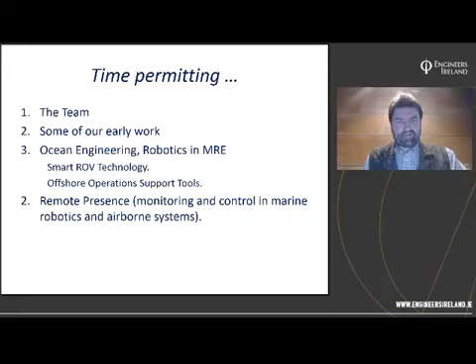So in some respects, there's overlap to space robots in that we are interested in a certain amount of teleoperation. I guess it's worth saying that some folks in the marine robotics world call it inner space, in that we look up the heavens, we can see to the far-flung galaxies, we can see back to large fractions of the time to the start of the universe. Stand on the prow of a ship and look into the ocean, you can hardly see 1 meter through the water. So in many ways, the seabed and the ocean environment is hidden from us. That's a quick look at some of the team.

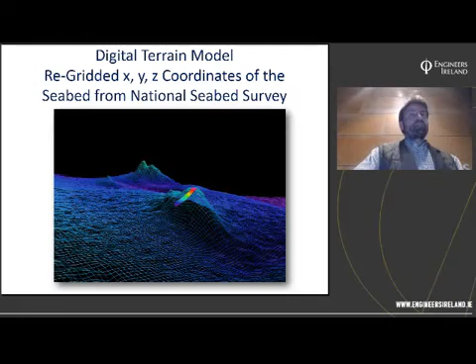So we started making robots, AUVs and whatnot, around the early noughties. In early noughties, we ended up teaming up with marine scientists. So that got us engineers out of the lab and trying to deal with stuff in the ocean. So that image is a regridded seabed terrain based on data captured by the Irish National Seabed Survey. Our brethren in Galway did the regridding, and when you regridded it at a lower geometry, lo and behold, certain mounds started to appear. And back in the early noughties, they discovered that the deep oceans have coral mounds.

So we ended up funded by HEA PRTLI, working on investigating coral mounds. We were the engineers going out trying to put the imaging sonars, the precision navigation on robots, and they're interested in the data for sonar mapping, video analysis and sampling to map the extent of the coral mounds in the ocean. There's significant coral mounds around the edge of the continental shelf, and there's some images of them just there.

When on this ship, we were integrating sonar and navigation instruments on a hired-in robot from Norway, and kicking the tires, we thought to ourselves, there's not a lot in that we can't do. So that's exactly what we did. We started off building our own robot. So we are essentially an engineering technology research centre addressing challenging domains in ocean and airborne environments.

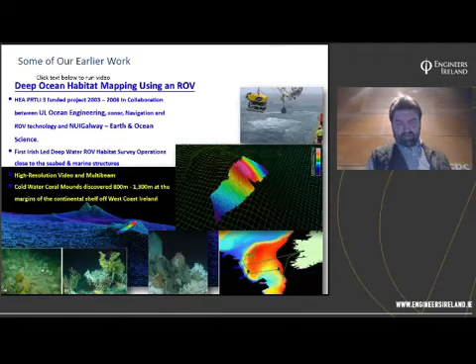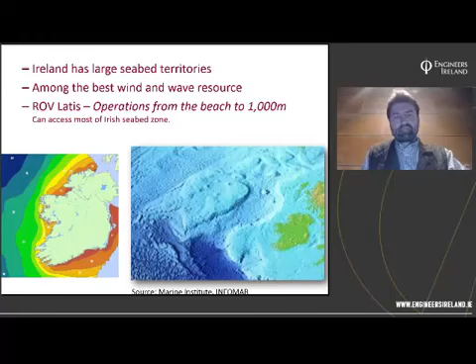No. There we go. Okay, Irish seabed territories. The oceans are vast, but the Irish seabed territories are 10 times our land mass. So how do we access these? So this ROV Latis we built is a 1,000 meter depth rated ROV, so it can access 80% of that territorial zone. The National Holland one can go to 3,000 and odd meters, so it can access the full territorial zone. So robotics in ocean energy, very widely used in offshore oil and gas.

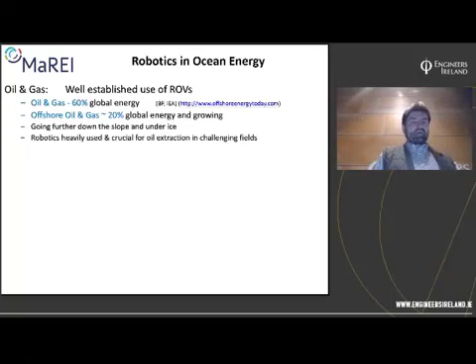Offshore oil and gas, except in the shallowest waters, wouldn't exist without marine robotics for inspection, repair, service, maintenance, etc. Marine renewable energy, it's not operational. We don't have operational utility scale marine renewable energy, but think about it. We want to put wave devices out in the ocean. We want to put tidal energy devices out in areas of very high and strong wave and tidal energy. This isn't the location of choice for conventional ocean energy.

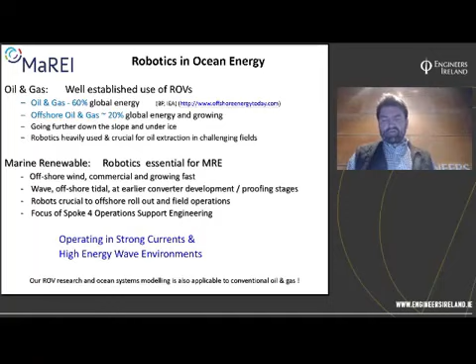So in fact, we're expecting an awful lot more of our robots if we want to be able to construct, inspect, repair and maintain in these challenging environments. So that's the unique challenges for ROVs and the other robots working in that environment. So what we're looking to do is our projects address significant constraints in the rollout and expansion of marine renewables. So it's wave energy devices, tidal energy devices, offshore wind, and offshore wind is the one that is already mature.

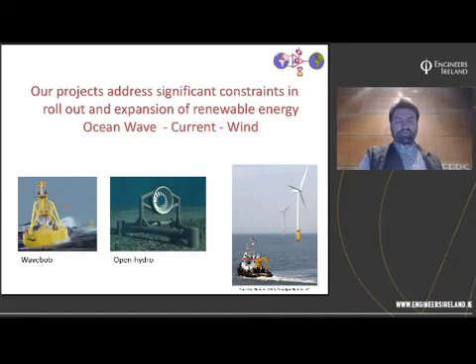Offshore wind is now looking at going onto floating platforms so that it can go into wider territories and deeper waters within the ocean. We've been working in this space for 16 years or so now. We've patented technology in multi-sonar control, and we've done a lot of work in underwater navigation.

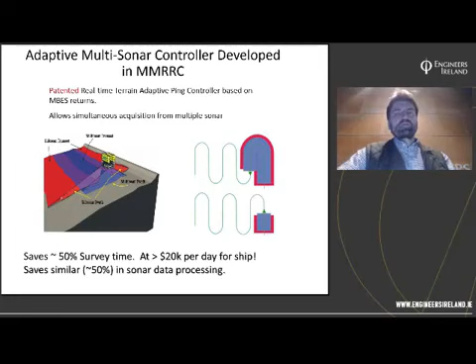Navigating underwater is challenging because radio waves do not propagate through the water. We can all navigate now because of GPS systems - our cars can tell us if we're on the road and help us get to our destination. That is much more challenging underwater because GPS is not available, and radio signals are not available.

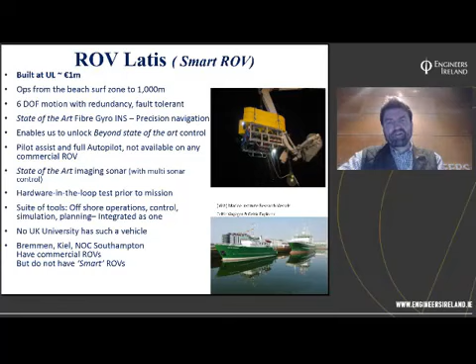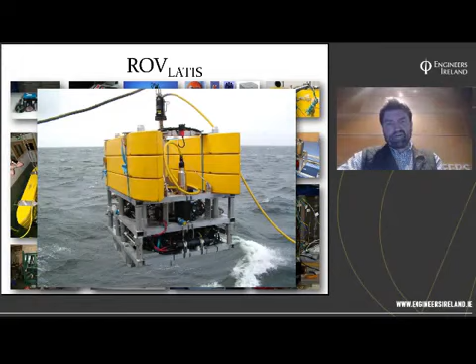ROV Latis at some of the key features of this ROV we built. Maybe based on the time window, I'll not dwell too much, but it's an ROV system we've built and operated offshore on about 10 offshore surveys over the last number of years on multiple vessels. Just some images of the design, construct, fabrication, and eventual maiden voyage off the Celtic Explorer. This image was borrowed with permission from Siemens.

The reason I like this image - the offshore is a challenging environment. If a storm blows through, such as Storm Henry yesterday, there were 30, 40 meter waves crashing off the North Donegal coast. So operating in that environment, we want our engineering structures to survive in that environment. We need to be able to inspect, repair, and maintain them in that environment.

So robots and ocean energy. Conventional ROV operations in offshore oil and gas punch through the splash zone down to the seabed. They operate in relatively quiet water, even if the surface is maybe up to sea state 4.

We want wave energy devices in the high energy splash zone or tidal energy devices in zones of very high energy. So if we want to be able to inspect, repair, and maintain, we don't want to wait for the one day a year when we get a flat calm sea. We want to be able to move up along the sea states, move along the current regimes, and perform these robot tasks. That's our challenge.

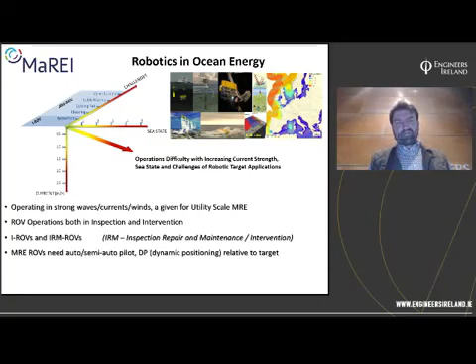We want to move that along the diagonal in that three-dimensional matrix. And current ROV technology can't really do that.

Some of the screens of the controls - we're effectively a control engineering group who develop control systems for getting these robots, applying semi-autonomous pilot control so that pilots aren't overwhelmed by the disturbance from the wave motion, the drag from the cable, while addressing the intervention or inspection task they're trying to perform.

In wave energy devices, which are heaving up and down in waves, do we need to inspect those devices? Do we need to inspect the anchor chains which are heaving up and down in the ocean? So our target is potentially in motion.

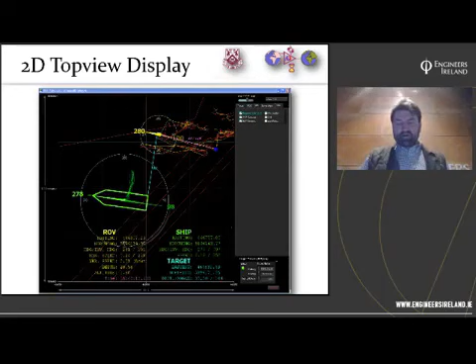So we've developed some screens. The 2D plan view is as simple as possible. We want numbers floating with the devices. So these - the ship on the surface, the ROV in the plan position view - follow the actual instance, the real ship, the real ROV in the ocean, with the heading, with the depth, all visible without the pilot having to scan from display to display.

Advanced pilot interfaces - we could show you a lot of detail here, but there's a live video of some of the information captured from an ROV surveying a seawall with the sonar image inlaid up on the top left and the pilot control view on the right.

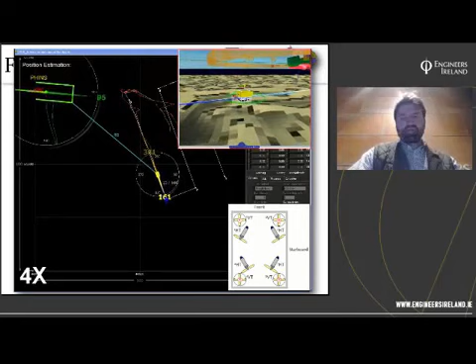I'll skip ahead. This is another view of an ROV operation in Bantry Bay doing a survey on a wreck called the La Cerf-Volant. I can't remember French.

One of the many failed sort of revolutions in Ireland. A lost wreck.

The LÉ Eithne - we operated on the back of the LÉ Eithne, the flagship of the Irish Navy, with our ROV system doing a survey of the UC-42, a German World War I wreck, which sank itself driving back over its own mine. They expect what happened was a destroyer maybe came over the horizon. The U-boat, which was laying mines, reversed over its own mine, blew itself up and sank to the bottom.

So sorry, if I can just launch that video - I should have had it launched while I was speaking. So downward-looking cameras, forward-looking cameras running over the wreck, and we won't have time to go see the whole thing in. So more video.

We'll get to the interesting part. This is the real-time capture of the sonar imagery over that wreck.

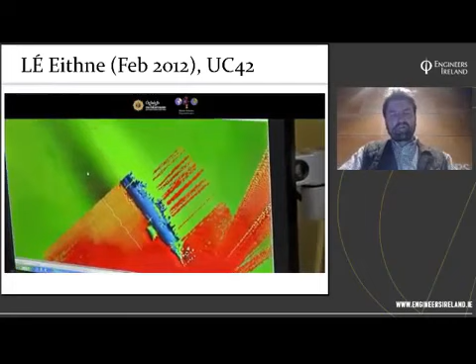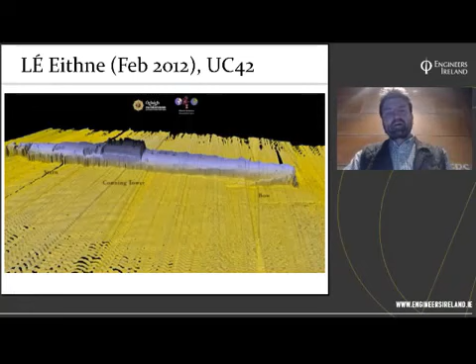Further along the same wreck, and then a first look at models of the U-boat on the seabed. That's it - a digital model of the wreck.

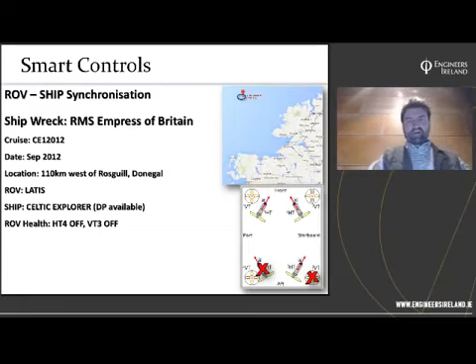Another wreck survey with smart controls. We're now surveying 40 miles off Bloody Foreland, 160 meter depth, a ship which is 2 meters short of the Titanic. That was the largest ship ever sunk by a U-boat, sunk in the Second World War - the Empress of Britain. We're operating in sea state 4.

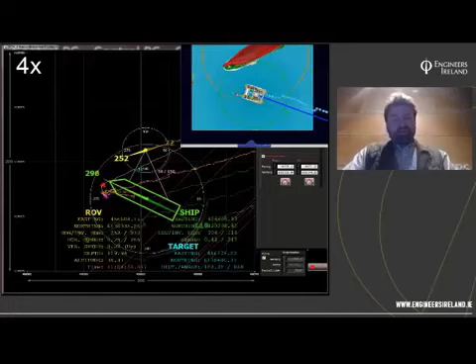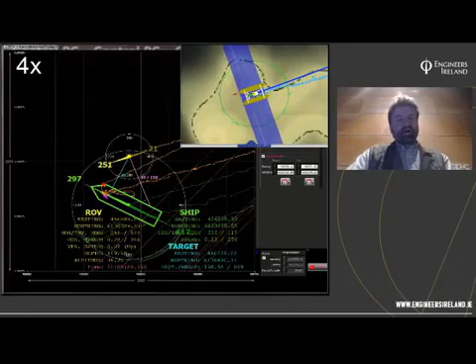We're operating with the ship into weather, with the ROV down at 100 meters, with the target 60 meters below, and the ROV and the ship working in tandem. With autopilot control on our ROV system, we can command the ROV and the ship.

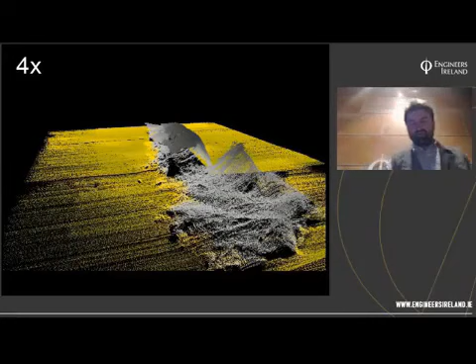The ship has DP - it's the Celtic Explorer - and it's crabbing along the wreck. The wreck isn't aligned in the direction of the ship; it's aligned in whichever direction it falls, and the ship has to face head to weather. So that's some first looks of the sonar imagery of that wreck.

We'll skip ahead to some features: operating in strong currents. We want to be able to hold the ROV on the target. If the ROV cannot hold against the 3-4 knot flow, often surface vessels have more powerful thrust, so we can leverage an ROV back onto a wreck using the surface vessel's thrust, with the ROV still controlling its surge, sway, and yaw potentially.

Numerous offshore surveys there. I won't dwell on it, I'll continue.

Some of the work we're now focusing on: if we want to be able to operate on offshore marine renewable energy devices which are heaving in the ocean, how do we inspect these devices? How do we even register relative to these target devices? We don't have a fixed target device.

We have GPS when we're on the surface, and an inertial navigation system which fuses the best we can do with sonar, acoustic position, and Doppler velocity log against the seabed, plus GPS until you dive. But even with that, it's very difficult to get centimeter precision in control.

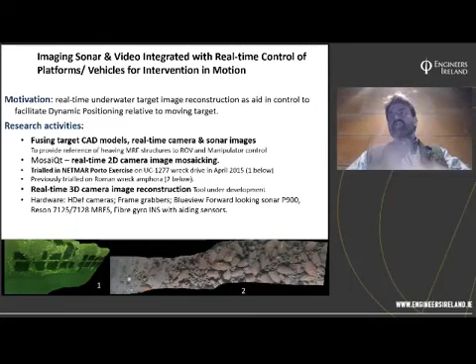So what we need is precision control relative to the target, and we're trying to address that based on image processing. We have a heaving device in the ocean - the ocean might be turbid, with wave bubbles entrained in the water.

There will be light variation with the wave motion. So we want to image the targets with cameras and sonars and fuse that imagery with the known geometry of the targets, in order to extract the pose of the robot and the robot manipulation relative to the targets, to aid in complete survey - 100% survey of the vehicles - and intervention.

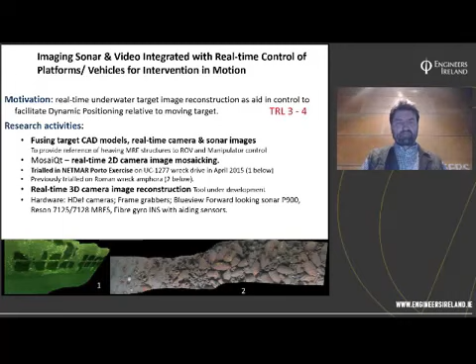Intervention is obviously more challenging. The key to this is we need to be able to do those imaging tasks in real time, and that's exactly the focus of this imaging research that's ongoing at the moment.

The other thing, if we want to be able to manipulate - the image shown here is a commercial ROV that works in offshore oil and gas. It's an Oceaneering ROV, extending its manipulator to operate some valves.

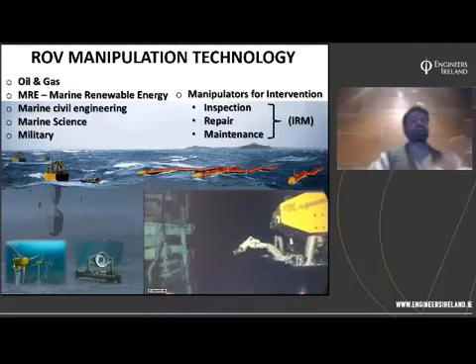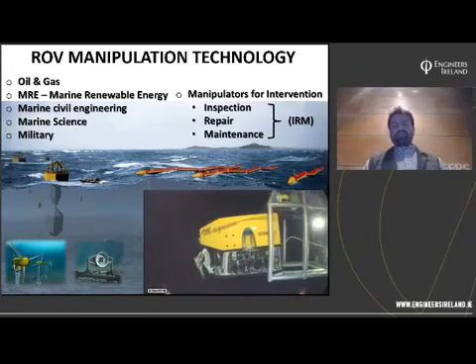If you notice, there's a certain amount of motion, but we're in a relatively quiescent subsea environment, way below the surface, way below the splash zone. Can we do similar tasks in the splash zone with sea state 4, for example? That's going to be challenging. If we can't do it, maybe we should forget marine renewable energy - we have to be able to do this, or else marine renewable energy becomes unserviceable.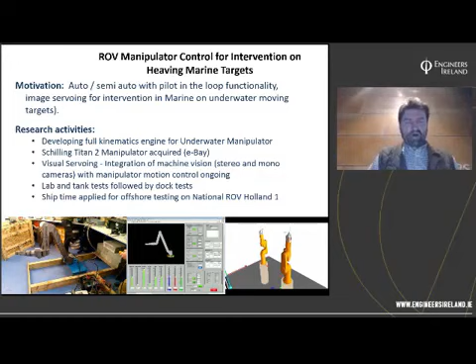So again, there's some imagery here. We're trying to develop and cross over some of the control techniques used in industrial robots. Industrial robots use precision servo control such that the robot arm knows where it is in its own reference frame. The robot arms on underwater robots are like...

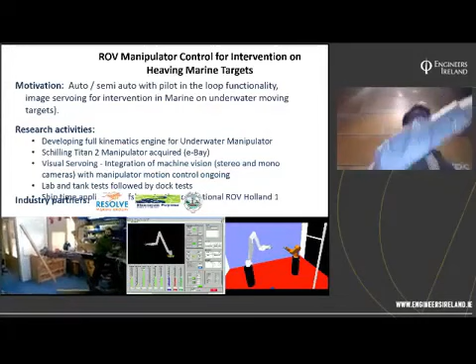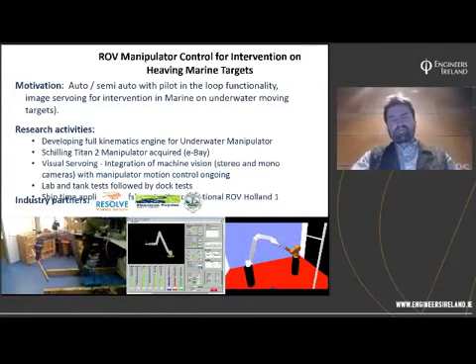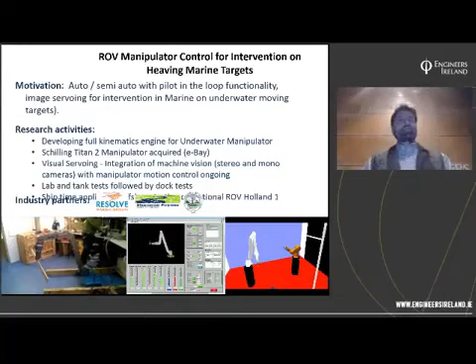...the backhoe on a JCB. They're controlled by a pilot through video in the loop, but they don't know exactly where they are. So we're looking to integrate industrial servo-controlled robotics with real-time image processing and base vehicle control. If we can wrap all that up into a real-time control package, can we interface with a moving target? Before we try to grab onto 10-ton targets, we might see if we can catch a passing fish - less chance of breaking ourselves.

Anyway, we've been gifted by Science Foundation Ireland funding to go after a marine renewable energy ROV. We want a high thrust-to-weight ratio ROV that can deal with significant... sorry, how did that go off?

Sea state conditions - we want to supplement this with our advanced control systems for remote presence. The other thing we want to be able to do is remotely control robots in the marine environment, so that we don't have to mobilize a ship every time a storm blows through.

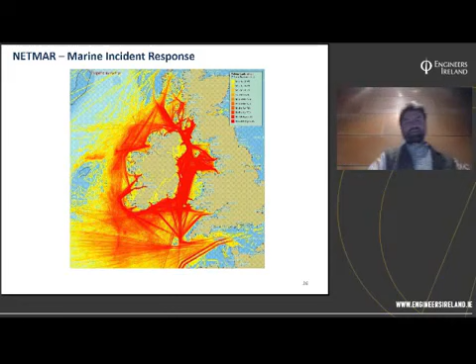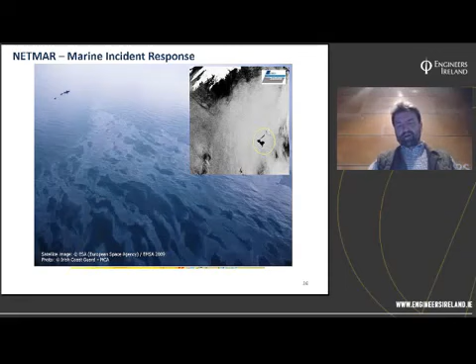So in order to survey these zones, obviously UAV technology will allow us to quickly survey. We've, in this exercise, operated a number of ships. The idea was to use robotic platforms to get as much information from the real-time environment back to command, so that command can plan safe deployment of first responders in the instance of a marine incident.

So the marine incident this exercise evaluated was a ship coming into Shannon Estuary, asking to come in because it had trouble - foundering, hitting a rock on the way in, losing power, taking on water, losing bunker fuel, shedding cargo off the deck as it listed. And you don't know, is it noxious and harmful cargo? You want to map the extent of the oil slick, etc.

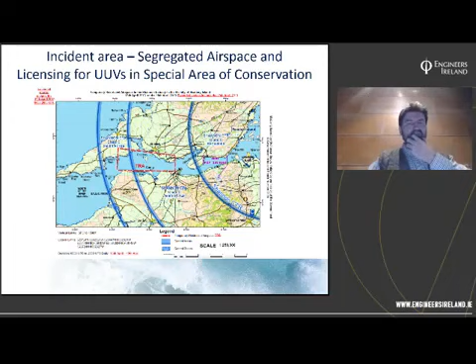So the idea is we need to segregate airspace for this first response, emergency response. The emergency response was led by the Coast Guard as the natural leader. We had Navy on as the lead on the water command, and our task was to feed real-time robotic feeds into the command, as shown on the bottom of that slide, in real time.

So I'll quickly show a video, which I doubt I'll have enough time for. Command center was in Money Point - that's the site inside Money Point. So I'll skip through the video rather than let it run its full 2 minutes or however long.

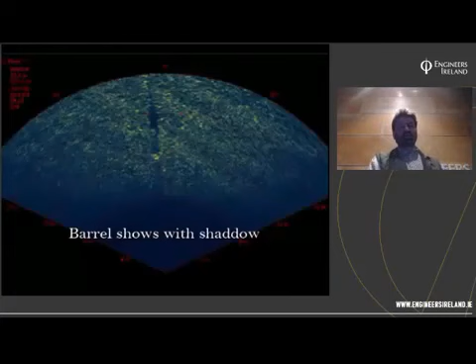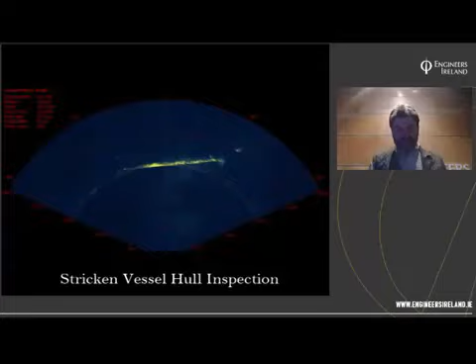Missing cargo - so we're searching for shed cargo on the seabed with ROV LATIS. We put ROV LATIS in the Shannon Estuary now. The river is flowing at about 1 meter or of that order at this point in the tide, so the ROV control system has to deal with the fact that the flow is pushing it sideways. That's the forward-looking sonar imagery.

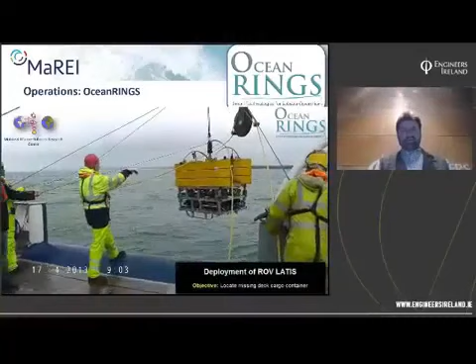And then we have UAVs as well, and AUVs. I'll skip ahead - that's it deployed again, is it? I'm sorry, have I a double video? No, maybe there's more detail on this one.

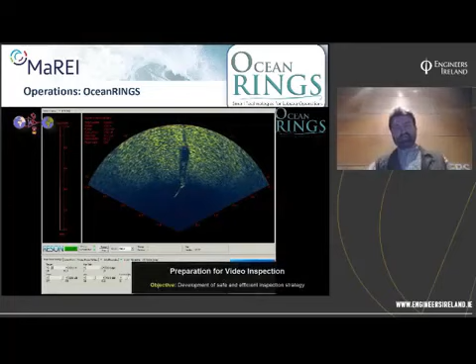So that's the forward-looking sonar which has found that cargo. The idea is to survey that cargo. And then this is a complicated movement where we're circulating the cargo in a river - something a human pilot could not do without the aid of advanced navigation systems. So we do a clockwise and then an anti-clockwise, then a clockwise traverse around the target to image it.

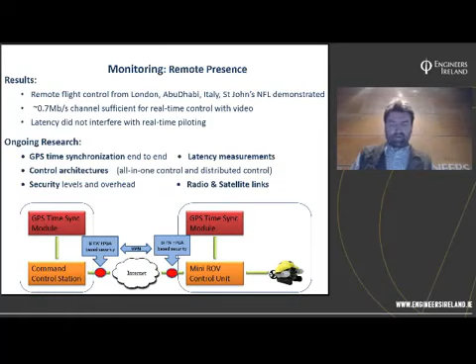This is another exercise in the same thing, in port exercise with a partner. Okay, so we want to be able to remotely control these devices in the ocean. So we want to add security to that remote control - encryption, so that nobody can interfere with our activity. So that work is ongoing.

And on the next - have I got this? Maybe I have my slides slightly in the wrong order. The other aspect is we have shown that we can remotely control these devices through the internet in real time from Abu Dhabi, from Italy, from North America. We want also to be able to control them offshore.

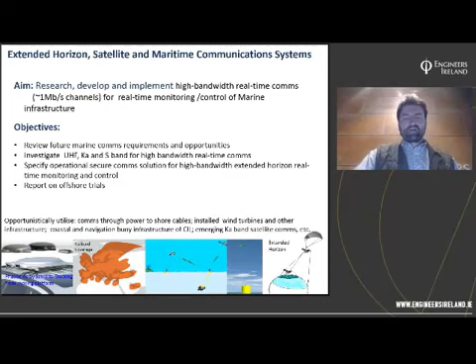So offshore, we will need radio communication. The high-bandwidth radio communications need direct line of sight, which means beyond the horizon becomes a problem. There's now Ka-band satellite provision, which extends significantly out to sea. If we go into the deeper ocean, we have to see - can our systems be delay-tolerant, real-time control systems that are delay-tolerant for satellite comms. So that's also ongoing research.

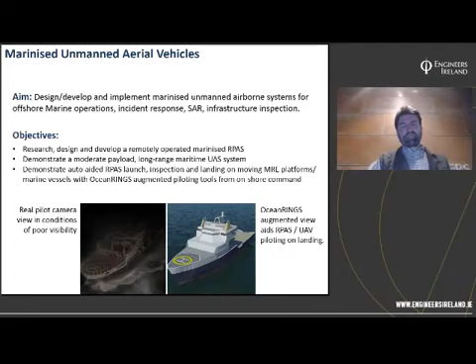We want to be able to inspect offshore plants - so can we take off, inspect, and land UAV systems on remote platforms, be they ships or heaving marine renewable energy platforms. So that's UAV research. We're active in UAV research.

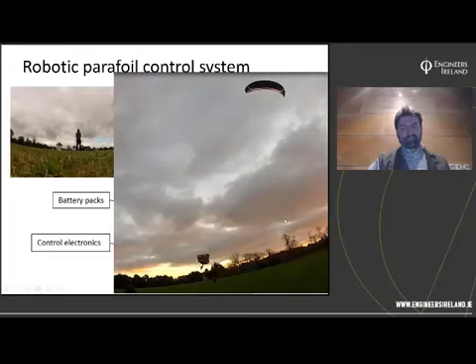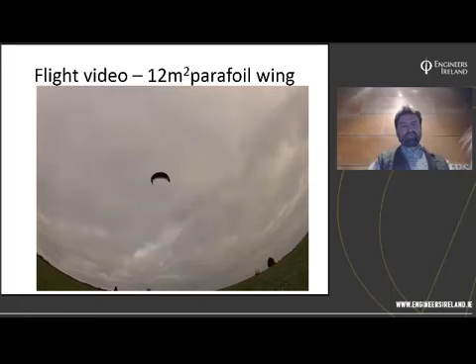I think I'm coming to an end. That's an automated parafoil system for wind energy generation, but also for sensors aloft to extend your radio horizon and your sensor horizon offshore. I think I'm nearly there.